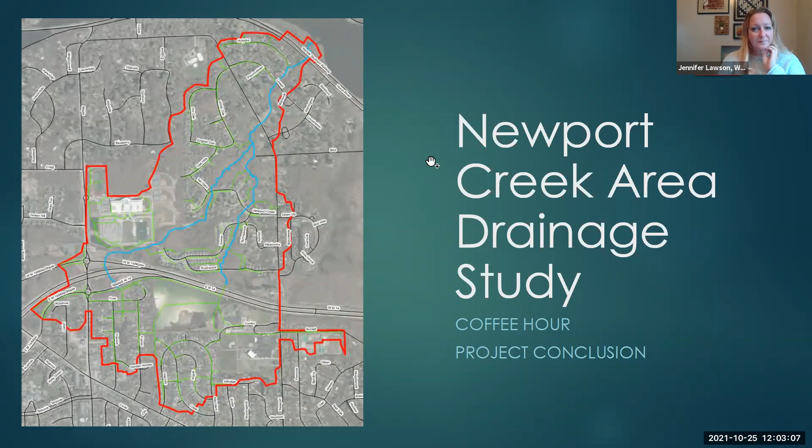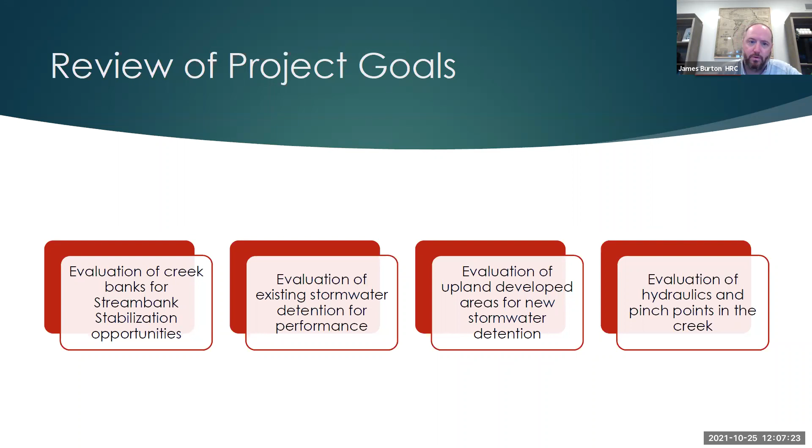We'll get into some of the percentages in a minute, but what we found out there is very typical of an urban stream system or an urban creek system. So it's nothing too alarming. It's just a matter of kind of characterizing that.

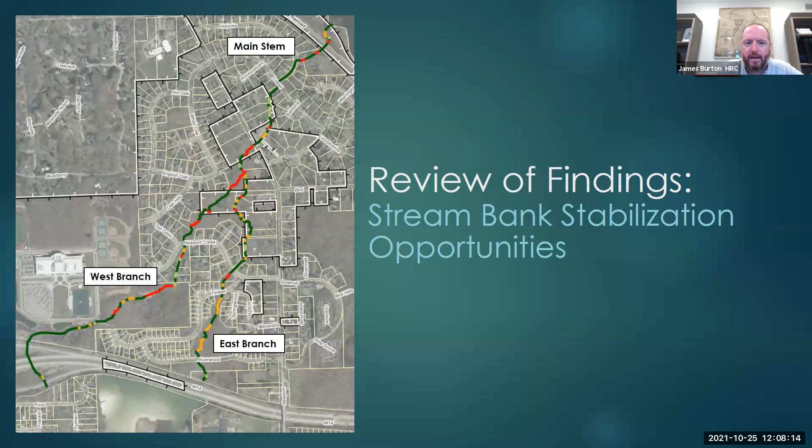So the different stats on these areas: about 22% of the banks are eroding. We have to know that stream banks in rivers, natural systems, move. Natural systems will go left and right and up and down over time. So just because something is eroding a little bit does not mean it's a bad thing. It's part of the natural process that rivers undertake. It's when they become significant, severe, or cannot be mitigated or stabilized naturally that they become a concern.

It's everywhere in the system. Regardless of severity, each different section has kind of got the same amount. There's not one very large hotspot. But of those areas, most of them were significant, either moderate or severe types of erosion.

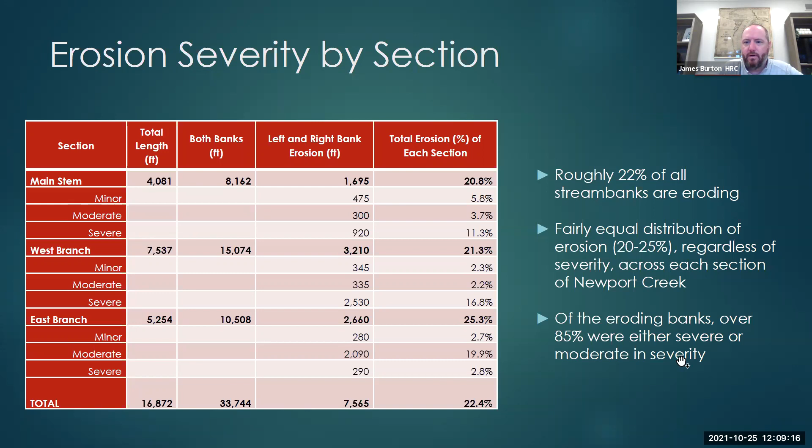We also looked at different things that were out there. Again, wood or trees or brush in the stream system is not a bad thing. That provides cover for different kinds of animals, wildlife. It also can provide stability, but sometimes it can make instability. We found quite a bit of blockages related to log jams and sediment bars out there, just under 40%. Fallen trees that have either fallen due to disease, due to age, or they were in the riverbank and then the riverbank had moved a little bit and they had fallen in there. We did find quite a bit of those.

We did find some deposition. So the opposite of erosion is deposition. So it picks it off the banks and then deposits it somewhere else. Found less than 5% to have some deposition. Some of that can cause problems. That's a sign of instability. Sometimes it is not. It's just a part of the natural process.

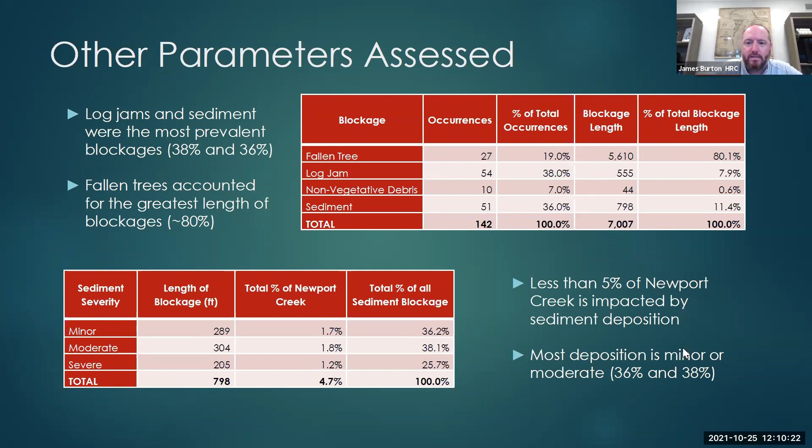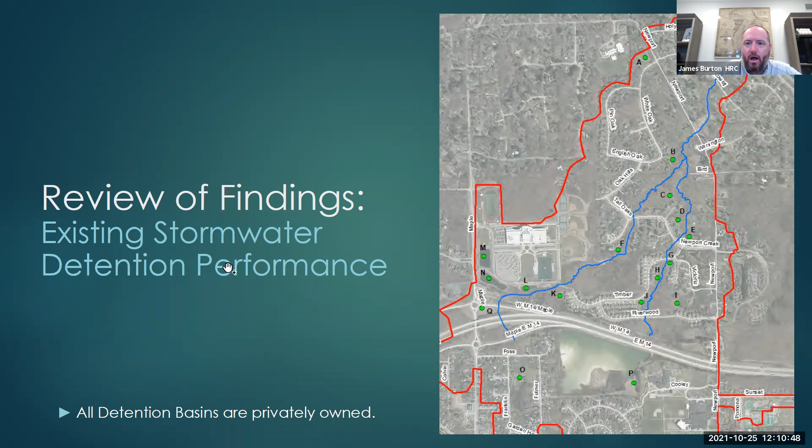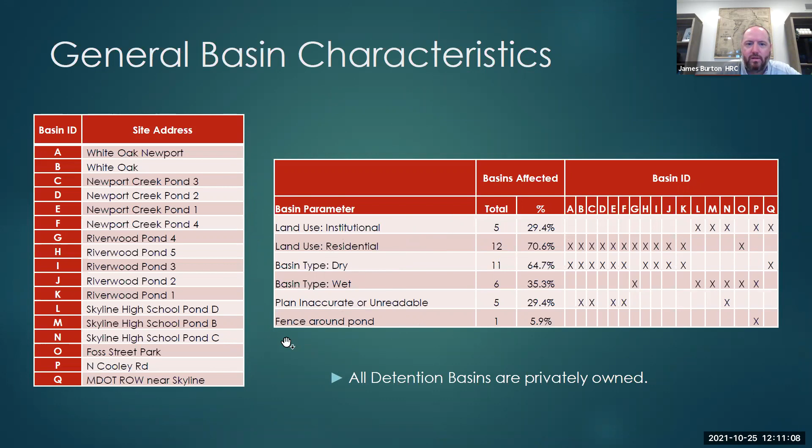So you see there's a number of privately owned detention basins in this system, as identified by all of these green dots. We went out there and pulled whatever plans the city had available on these systems, and then went out in the field and compared them to files and made references from there. So the different A through Q is just which of the ponds, what types of ponds they were. These are just the basics, what they are: residential, commercial, trying to figure out what they were supposed to be, wet or dry basins.

And then we went through all 17 basins with these kinds of parameters. Is there deposition, sediment? Are they completely vegetated in with something that shouldn't be there, invasives, for example? Are there blockages? Is there flooding, excess flooding? How are these basins really holding up? Are the buffers needed? What needs to be done?

Of the 17, 11 are recommended for additional maintenance. And basically, these have to do with normal routine things. Most private detention basins do not have a routine plan. They're maintained kind of as needed by the association or by the homeowner group. So this is, again, very common, but it's definitely significant when you look at how many basins there are and how many of them might have a little bit reduced capacity.

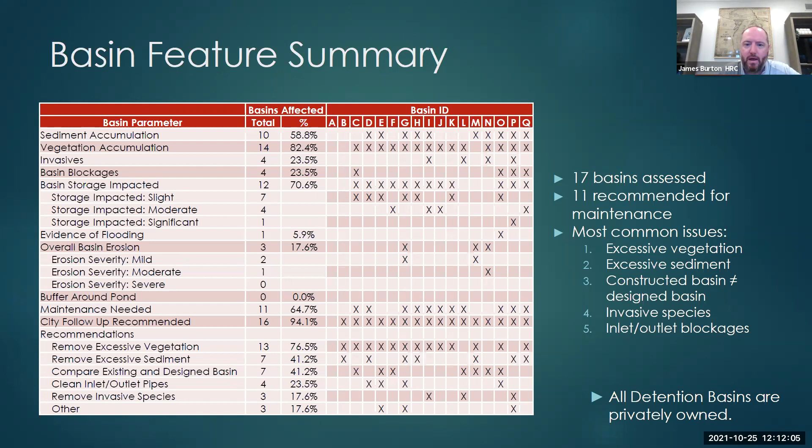We've identified several areas of open space, maybe publicly owned, school owned, or just open areas where additional stormwater detention and volume could be provided. That will help reduce flooding and help buffer the system for the flashiness of flows as they go up and down. It provides some real good buffering of the overall system.

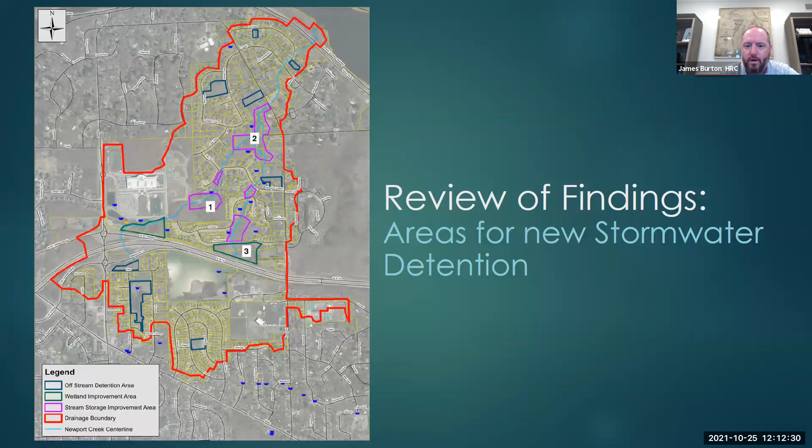And we went out to each of these sites to evaluate them for the potential, starting with a desktop review. Can they be expanded? Are they readily available to increase storage? Are there floodplains? And I'm not talking about the 100-year floodplain. I'm talking just out of bank, out of area. Can they flood? Can they store water? Or would the flows just bypass and go someplace else that we don't want them to go?

And we really focused in on what could be done practically. That includes enough room, enough elevation, and where in the watershed. One at the very upper end might be great, but one somewhere in the middle where the branches come together might have a little higher priority because it has a better impact upstream and downstream. One at the very outlet, everything's getting there first, and we want to provide some along the stretch.

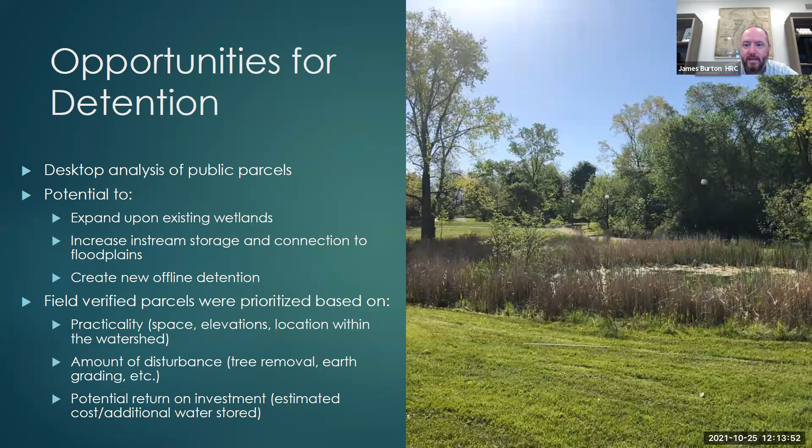We also know some of these are very wooded, or maybe they have a lot of hills or a lot of slope to them. So how much disruption would have to be done to put these into some sort of storage? And then just dollar per square foot, dollar per cubic foot. We have to look at this in terms of cost at some point. Just how expensive is it to get one gallon of storage versus another at each site.

So we found a few of those that we thought were worth pursuing. One is up by Skyline, offline pond or wetland complex available. Second one would be at Newport Hills Condo Association, where the two branches come together. This is more of an in-stream storage. So this would be opening up the shelves, opening up the cross section so that as water came in, it had a place to go versus kind of channelized downstream.

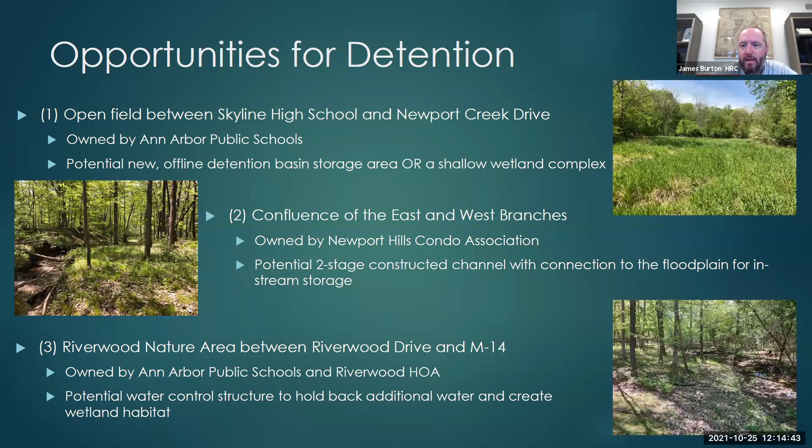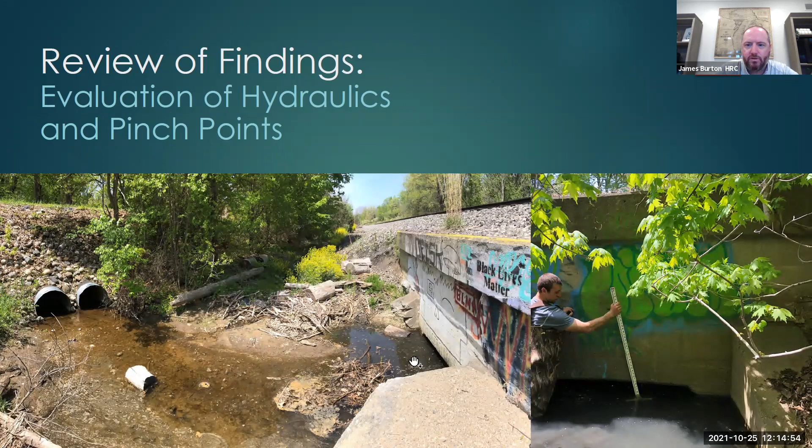And then the nature area, Riverwood and M14, again, owned by Ann Arbor Public Schools. This would kind of restrict the flow, hold back water, create some wetland habitat, provide flood storage as well. There are a number of hydraulic pinch points or areas that kind of control flow, especially down at the railroad tracks immediately upstream.

So we went and did some hydraulic modeling. We pulled the US EPA model. It's called the SWMM model. And this is where you take rainfall events and you simulate how the system reacts to that. So this is how we got a base model set up, and then we put in different kinds of storage to evaluate how those potential improvements, namely storage, would impact.

And so I think that's real important when we talk about, well, there's no flooding under a 100-year event. Well, there is. We've seen some evidence of that, and it appears that that's accurate. Just the modeling, the technical resources don't support that, but we found out why, as you're looking at those photos. So we were able to correlate technical data with field data with resident input to show that there are areas that potentially could flood.

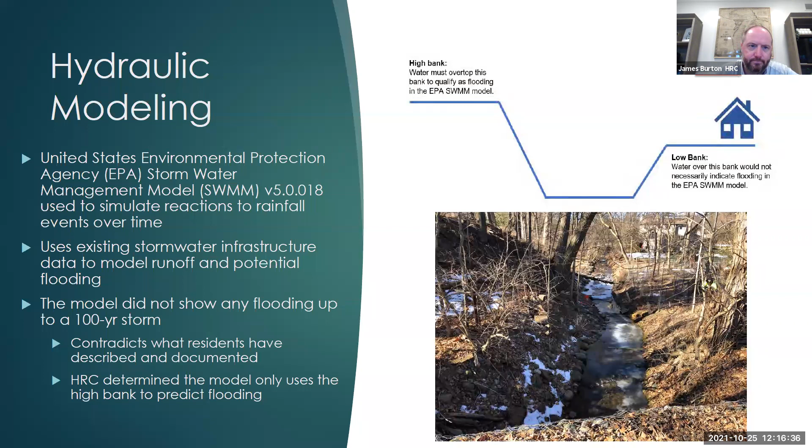So we added about 1 million gallons of storage, and really looked at how that would impact peak flows, how high, how fast the water goes down. And we put it all at the end from the idea that all the flow goes through it, versus east-west Skyline only through the middle. And basically we came up with the idea that if you added this amount, 1 million gallons of storage, which is about an estimate of the open area between Skyline and Newport Creek Drive, you would be able to reduce the 10-year peak flow by about 8%.

So that's a pretty decent reduction. It's expensive, but that's not insignificant, okay? 10-year simply means that in any given year, you have a 10% chance of exceeding a threshold. That number is constantly moving based on climate data. It happens pretty frequently, especially this past year. It's happened a lot. But adding storage would definitely show a minor impact or improvement on that.

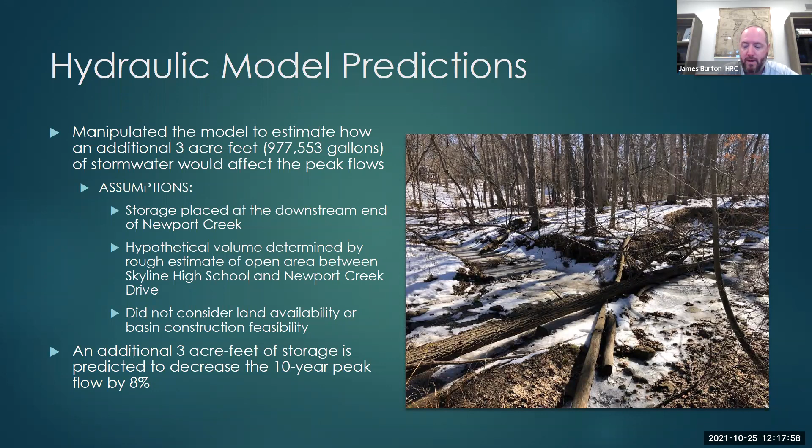So what are the basic solutions? We're recommending stream bank stabilization. Some of this is digging out the channel and redoing it. Some of this is adding low impact development type features, stone, toe wood, vegetated banks, adding some in-stream structures to make sure that the grade is controlled so that it can't go vertical or too far horizontal. We do think that the first item of business is to optimize the existing storage that's there by cleaning out and restoring any existing ponds.

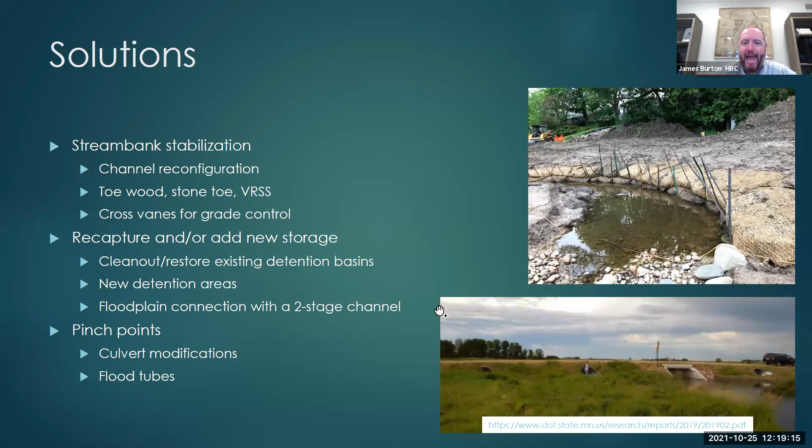Then you would go in and add new areas. And in areas where you were doing stream bank work, you would look for additional floodplain storage by building a two-stage channel, low flow and an upper flow channel. But you wouldn't go wholesale and do that end to end until you explored and exhausted the first two options. And then there are culvert modifications at the downstream crossing and the railroad crossing. Then flood tubes are in the picture in the lower right. That's just adding additional capacity with smaller culverts offset.

So putting a little bit of cost in there, short term, getting to each of these private stormwater detention basins and cleaning them out would be a great way to start making immediate impact. And those are in areas that maybe the city or county can't get to right away anyways, because again, they're on private property. Rain gardens would be of benefit, but you would need a lot of them to make a significant impact. Downspout disconnect.

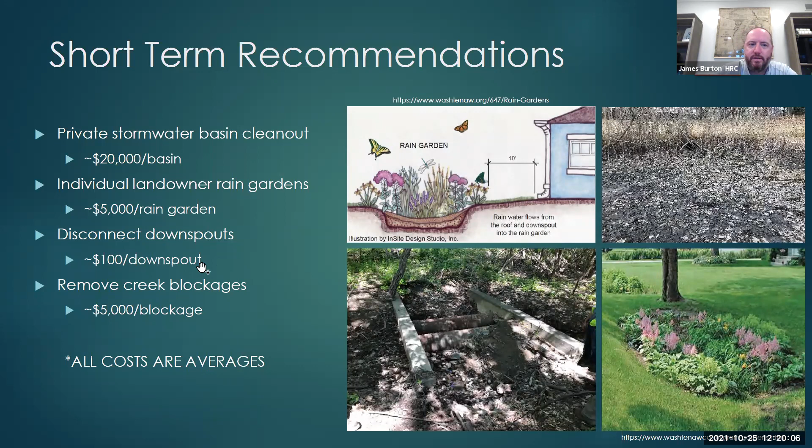And then there's 2 or 3 big blockages that are out there. This is an old trench box, and there's these old pipes and these old things that are out there, old structures, old crossings, that if we could remove those would have some immediate, very cost-effective improvement to be made. So long-term improvements, we got to get in there and do some stream bank stabilization.

We talked about adding new stormwater storage, address the pinch points, floodplain culverts, and we put in some average costs of each of those. These would be built in over time in a phased approach through the city's CIP system. So overall potential CIPs for the project does not include easement costs. None of this work is on any kind, other than where it crosses the road. Schools are quasi-municipal, but none of this is on city-owned or county-owned property, would require easements. So we have not included those costs.

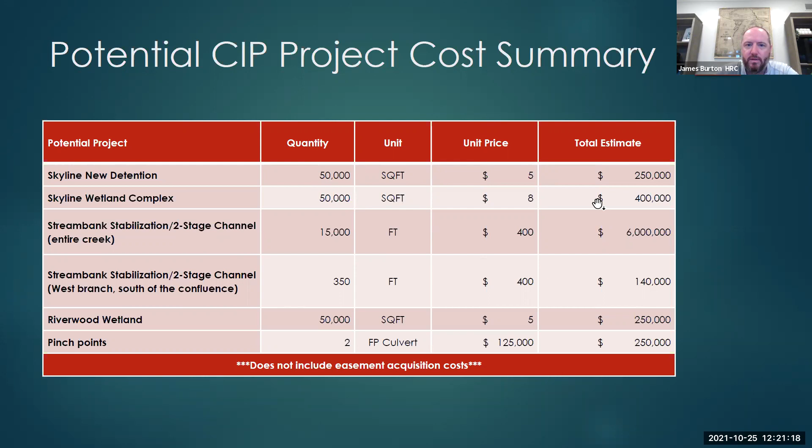But generally, here's what you're talking about, working our way through to provide new detention, new wetland complex, repair the entire system. Again, you wouldn't do the entire system end to end per se, but definitely you have to kind of plan on ultimately getting to all of it. So here's the CIP summary.

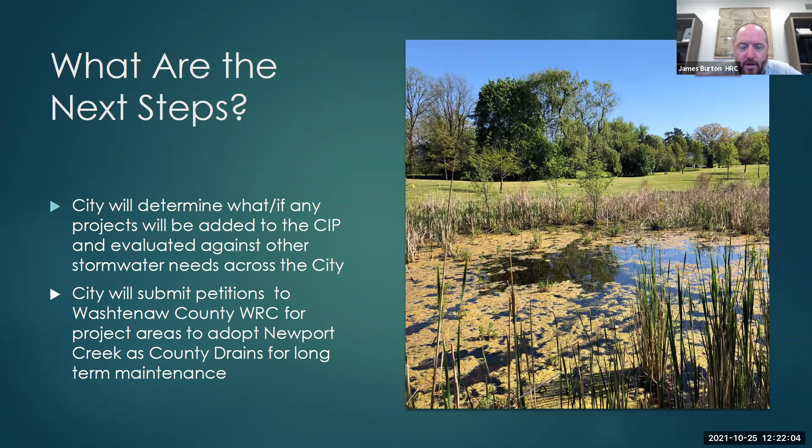So what do we do from now? So the city decides if any of these projects do get added to the city CIP, which is citywide, not district, not watershed based, and are prioritized based on city needs and budgets. And then the city would work with Washtenaw County for a petition process to either convert this to a county drain, or to convert the sections of work into a county drain, so that the county then could go ahead and proceed to do the work under the drain code. So that's kind of the next 2 steps of the process.